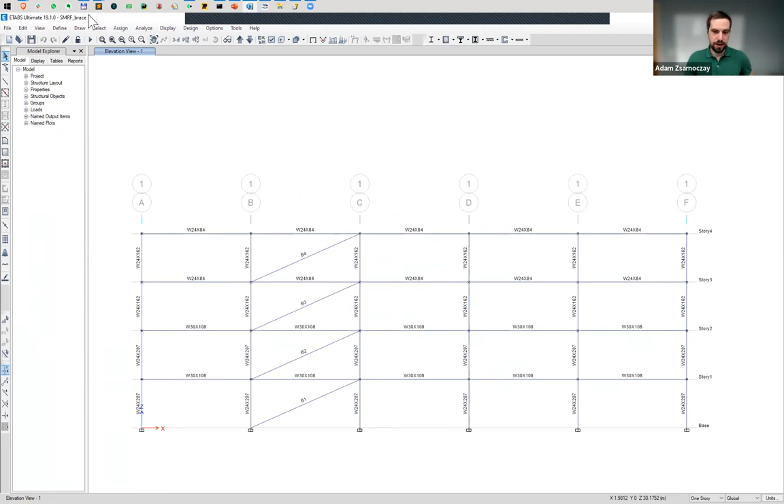And then within quoFEM, what we will do is we will link to a Python script, and I have that on the next slide. And that Python script can access this file. And if you use this template, you would need to update the location of the file on your computer. So we access this file and then do a modal analysis, as you can see in the script here. And at the end of that modal analysis, we will get the vibration periods of the structure, and we will try to match those vibration periods to what we measured on site.

Okay, so the main steps are first connecting to ETABS. This is done through a so-called COM interface. This is exclusive to Windows, just like the ETABS application. So those running on a Macintosh would need to emulate a Windows environment, but I think if you are running ETABS, you are used to that anyway. And then within that environment, you can connect to ETABS through Python using this comtypes package, which is using the COM interface that is built into Windows.

And then through that interface, let me pull up that code just to show you a couple of examples of how that works. You can access ETABS, you get this ETABS object, and then you can work with this ETABS object as if it was the application itself. So you can start it, you can see that here, and then initialize a new model, open a file, set cross sections, get masses, run an analysis, and then in the end get the modal periods. So that's what we are doing. We are essentially controlling the application through a Python script.

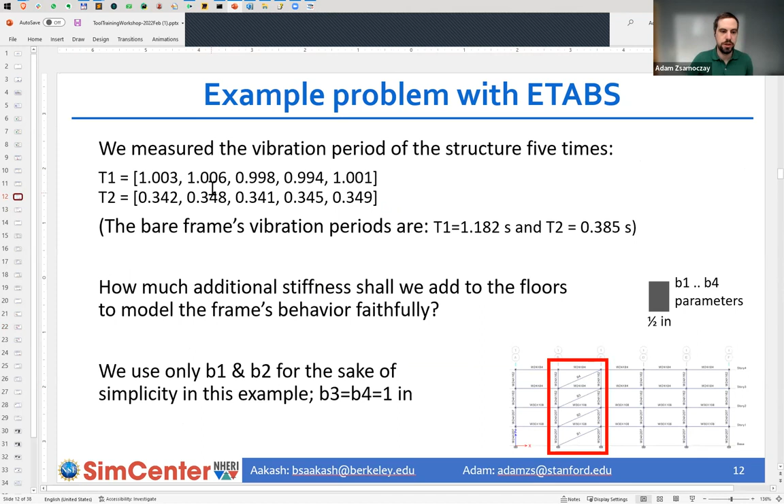Now, remember that we had a number of measurements here. So if we change to another measurement with another target T1 and T2, we would arrive at different B1 and B2. And then the question is, how do we deal with this? Because, at least according to this deterministic option, we can only use one pair of results for our future analysis.

And one of the possible answers is Bayesian calibration. Aakash will talk much more about this, but I just want to show you that Bayesian calibration is available with the Python option also. But as you saw, ETABS is sometimes difficult to run. So running a Bayesian calibration, which in this case required 2,800 model evaluations, is sometimes challenging with it. That's why we are not using that in this example. But you do have the files and you can test your luck with ETABS.

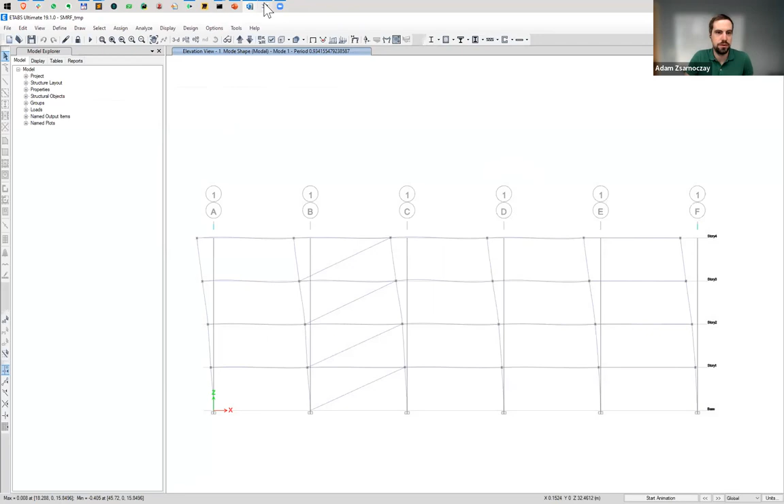So you see quoFEM here, forward propagation, the modal analysis that I've shown. This is exactly the same thing that I've shown before. Nothing changed in quoFEM. We don't have any results here. And ETABS restarted. We have the frame here. And when I click run, you should see in ETABS that this is running, I'm not touching it, and this is running the analysis remotely through quoFEM.

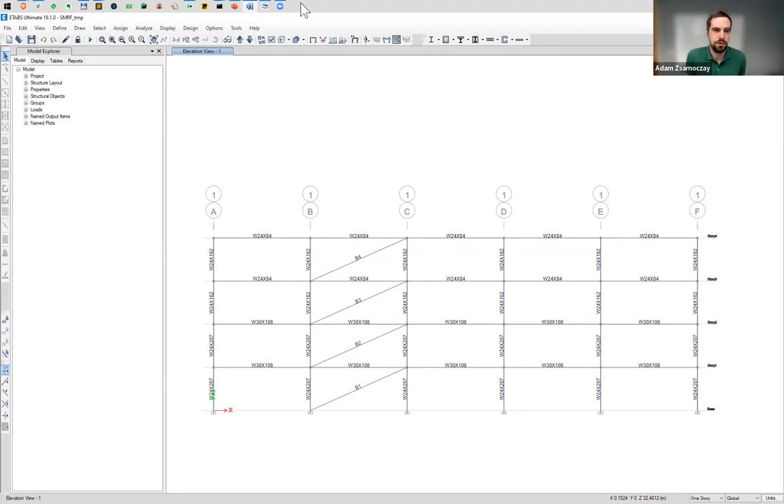You will see as it transitions into a modal analysis, you see the mode, and it extracts the result. This is it. So this was one analysis, and then it runs it, loads it again, changes the stiffnesses of the braces, runs the modal analysis again. So this is what's happening automatically through that script. That's all I wanted to show. And I can keep this running, and I think with that we can conclude.